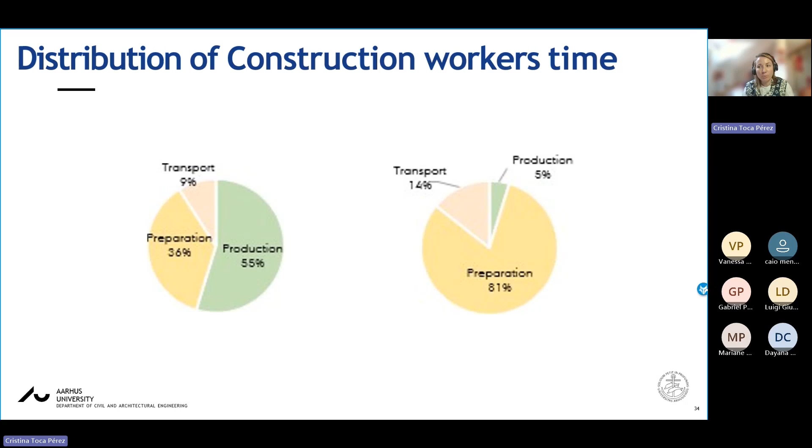It's important to understand workers' distribution because it's not the same if our workers spend most of their time in production activities or in preparation activities. This is going to be very different independent of the kind of process we are studying. But in general, thinking with our lean construction philosophy in mind, all of us want our workers to spend most of their time in production activities.

If you are not familiar with the idea of which is preparation, which is production, or which is non-value-adding activities, we need to remind ourselves of the transformation-flow-value theory from Koskela in 1992. I know some of you are familiar with this theory, but just to have in mind and refresh your minds.

Production in the past was seen as just transformation activities, or transformation of inputs into outputs. But more than 30 years ago, Professor Lauri Koskela from Finland developed a theory that we cannot see production in the construction industry as just transformation. Production is more than this.

We need to consider production as a combination of three kinds of activities: the transformation, which are the activities that add value; the flow, which is also the flow of materials that are part of the process; and the value, which is the cost, what the clients or customers require.

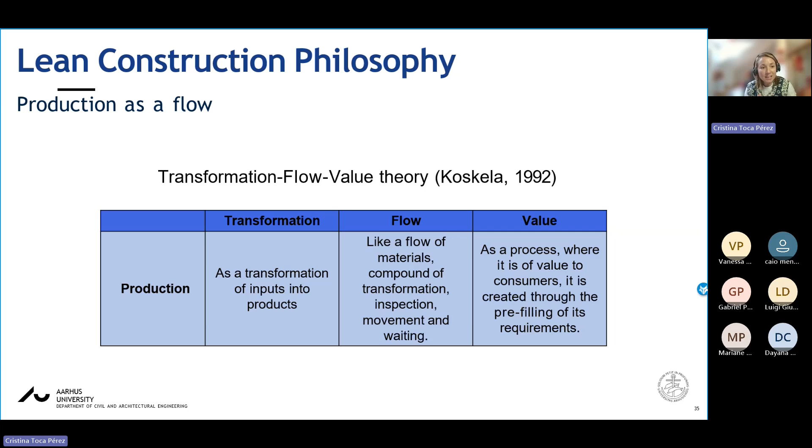Production is a flow of materials and information from raw material to the final product. Having this in mind, the only activity that adds value to the client is the transformation, which is when we transform a material into something else—it can be a new product, or a secondary product, or a sub-product.

In order to make our process more efficient, we need to reduce the number of steps or activities that do not add value to the process. It means we need to reduce the number of storage, transportation, and inspection activities, and try to maximize our transformation activities—spend as much time as we can in transformation activities.

So how do we understand or see how much time we spend in transformation activities? Transformation activities are important because the client of our products is ultimately going to buy square meters, or something that we have developed or transformed.

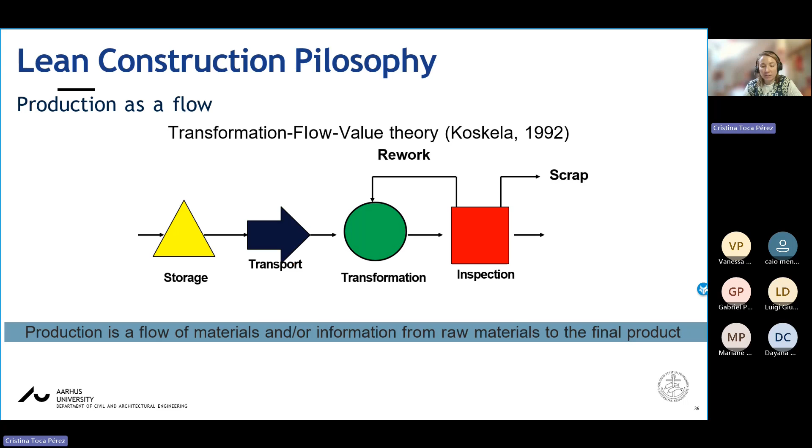In the lean construction philosophy, we understand transformation as the activity that adds value, and the others do not add value. So having this in mind, some researchers have developed techniques to understand how much time we spend in those kinds of activities, in transformation, and the other kind of activities.

One of the most famous techniques is the work sampling technique. It has been called in different ways. In Portuguese, we say amostragem do trabalho, but all of them have the same base, which is a random observation method where we try to determine the percentage of occurrence of certain activities by statistical sampling, random observation. It involves taking a small sample of occurrences in the overall activity.

So I'm going to explain in my own words what this means. You are in the job site, you identify a process, and you try to see how much time the workers spend doing this kind of process. Imagine they are applying mortar on a wall. How much of their time do they spend applying the mortar? They are transporting the mortar bags on the job site. How much time are they spending looking for the measuring tools?

If we take as many samples as we can, then we can say that the number of samples is going to represent how it happens every time on the job site. So which are the main steps for making a work sampling?

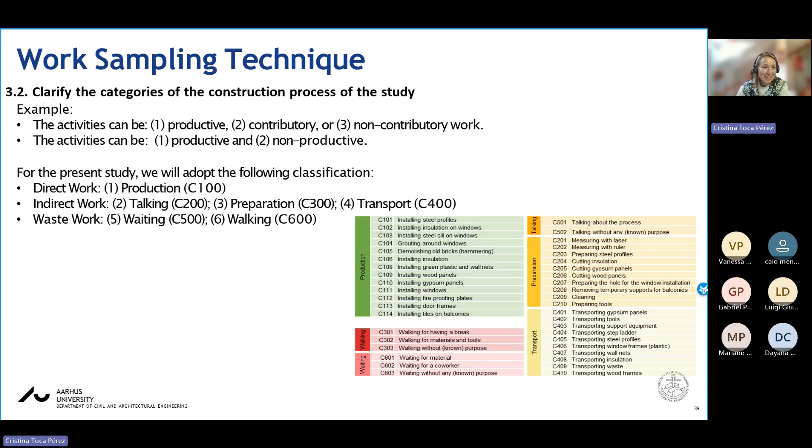In this case, we used an iPad for making the collection. So every time that we saw a worker, we identified what kind of category they were doing. It was preparation, transport, and then we have it's just a counter. And then you have, okay, I have observed 20 observations out of 100. So 20% of their time they were doing preparation.

I observed 50 times doing walking. So 50% of the time they were doing walking. So you can say if they have 8 hours of work, they were walking 4 hours, for example. And this is how it works, this is just a count. And this is how the work sampling technique works. It's a screenshot, you need to say what you are seeing in that specific moment and register it.

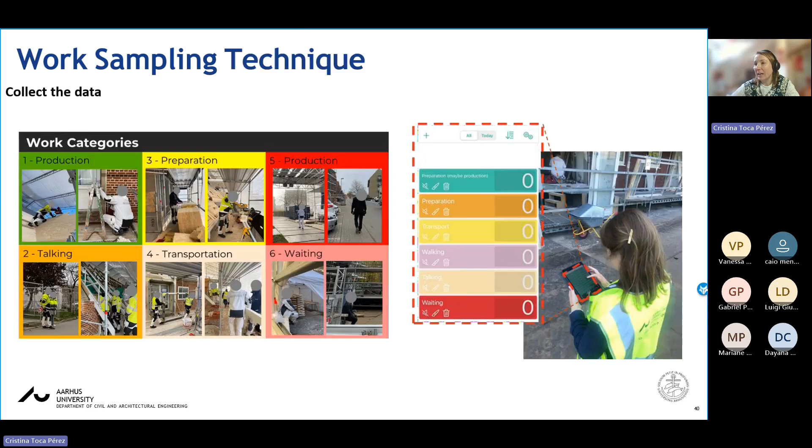And then with the data that you're going to collect, you can make different kinds of analysis. You can try to see in 8 hours of work how much time they spend, but also you can see in which hours of the day they spend more time in preparation or in transport. For example, you can see that at the beginning of a day they are spending more time in transportation, and then in the middle of the day they are more productive and spend more time in production.

So this is generally what the work sampling technique has been doing in the last 20 years. But that technique, or that way of making the work sampling, has been very criticized for several reasons. Some of them are because it's just a snapshot, so what you have is what you are seeing in that specific moment, but it can be different in another moment, or on another day, because it changes a lot.

Because you know that the construction job site is an environment that changes every day, so maybe what you are seeing one day is going to be different from another. And also it's criticized because we can interrupt, maybe the observer is interrupting the workflow. So if you have the presence of an observer there, maybe the workers are acting in a different way than normal. Maybe they are trying to be more productive, or maybe they are just distracted. So one of the criticisms is that in some cases the presence of an observer can interrupt the workflow.

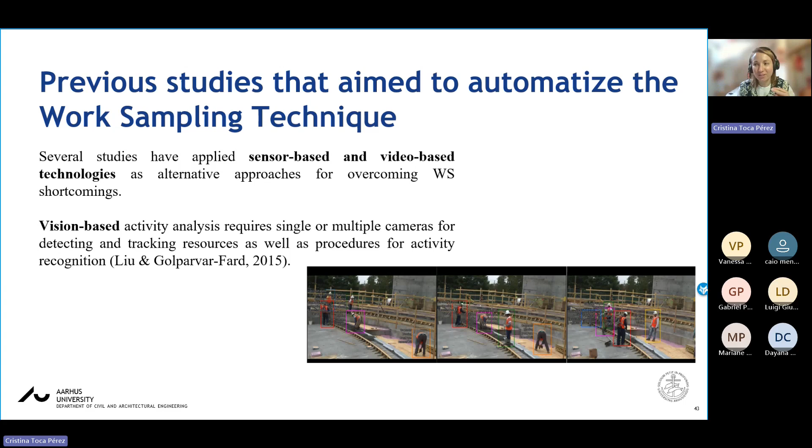Some researchers are using machine learning: they make the video, and then with machine learning they classify the categories of the activities. Another kind of study uses sensor-based technologies to identify the movement of the workers. So now it's not just that I can see he's painting or applying the mortar.

It was about using sensors on the body of the workers to try to identify the posture and the motion. With the accelerometers of the sensors, he tries to say, okay, if he's moving like this, he's painting, but if his hand is moving like this, probably he's just walking. So this is what they are trying to do when they use sensor-based technologies.

But obviously it has a lot of limitations because it depends on the kind of activity they are doing. The movement of the hands and the body is going to be different. So it requires collecting a lot of data to feed the algorithm used in the machine learning to identify which kind of activity they are doing.

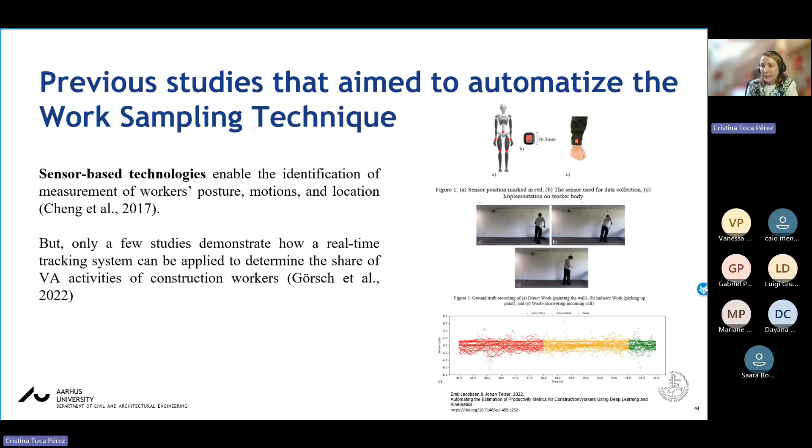Another study used indoor positioning like Bluetooth or BLE, Bluetooth low energy, to estimate presence indices. And that was our starting point. It's very difficult to make records of the job site because we need cameras, and it's also very difficult to have sensors on all the workers.

And even if we have sensors on all the workers, it's still going to be difficult because we need to tell the algorithm what each movement means, and it needs to identify which activities correspond to the accelerometer readings. So we said, okay, indoor positioning is something that can help us automate the work sampling technique. This is something they started in the group of Olli Seppänen at Aalto in Finland, and they began using indoor positioning systems.

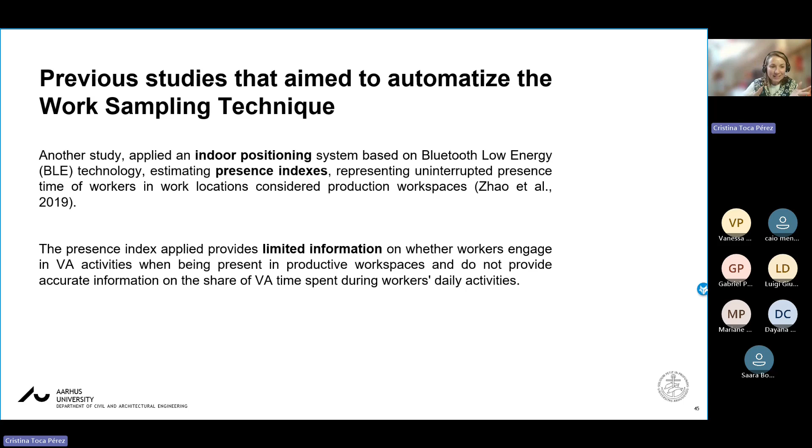They believe that the presence index can provide useful information. The idea is that the more you are in a specific place, the more likely it is that you are doing that kind of activity. It means that if you are in a production workspace, inside the building, it's more likely that you are doing value-added activities than if you aren't.

It makes sense thinking that way, because for example, if we are in our office or workplace, we are more likely to be doing value-adding activities, like reading or writing papers, or whatever makes you feel productive. But if you are not in that place, if you are in the corridor or the bathroom, you are probably doing other kinds of activities that don't add value.

So they have two basic assumptions. Presence is obviously not enough to say that value-adding activities are happening in a specific place, but it can be assumed. Also, if work gets interrupted, these interruptions are mostly non-value-adding activities. It means if you are in a production workspace and you are interrupted, it's probably for something that is not adding value, because someone wants to talk with you or needs something that isn't going to let you continue working.

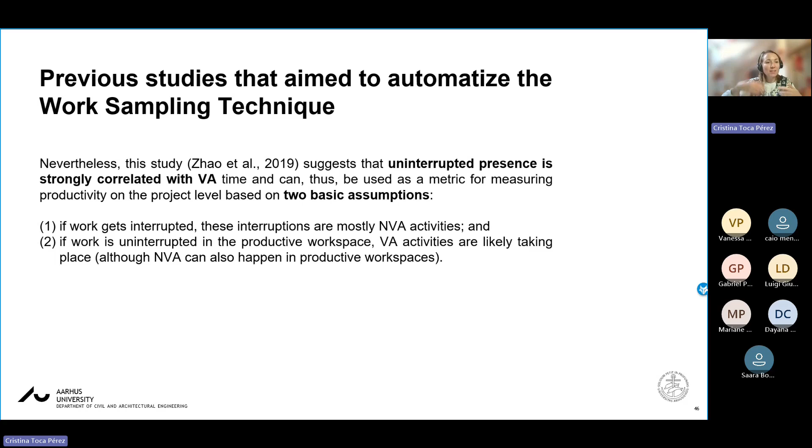Obviously, you can be in your workplace and do other kinds of activities, just thinking or talking, but it's more likely that you are going to be productive if you are inside the building in a specific place where you're supposed to work, rather than in other areas. So that was our assumption: let's think in position instead of trying to use the movements of the body to automate the work sampling technique.

This group of people from Aalto continued this idea, let's combine several kinds of data coming from video. They decided to continue recording, but also tried to identify the position, using head-mounted cameras combined with position data. They said, now we can record the workers, see what they are doing, and also identify where they are.

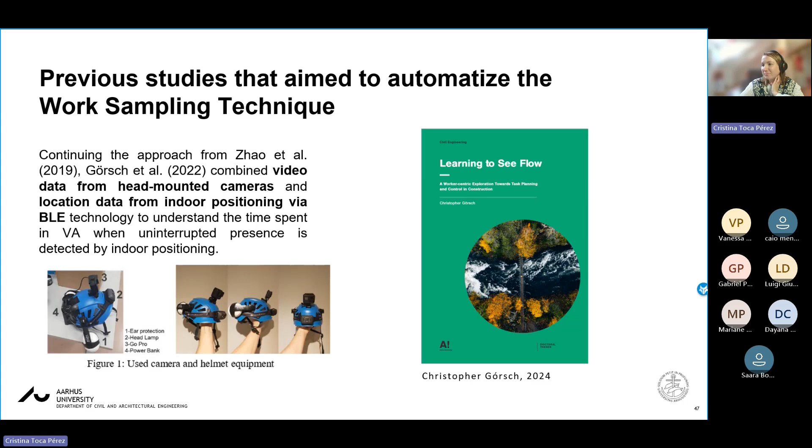You can see here the thesis of Christopher Górsch, a researcher at Aalto, Finland. They did a very detailed data collection, following a specific worker during his working hours, trying to record that worker and see what he's doing in an entire day. This took a lot of time, it was very time-consuming. Then they classified the activities into different kinds.

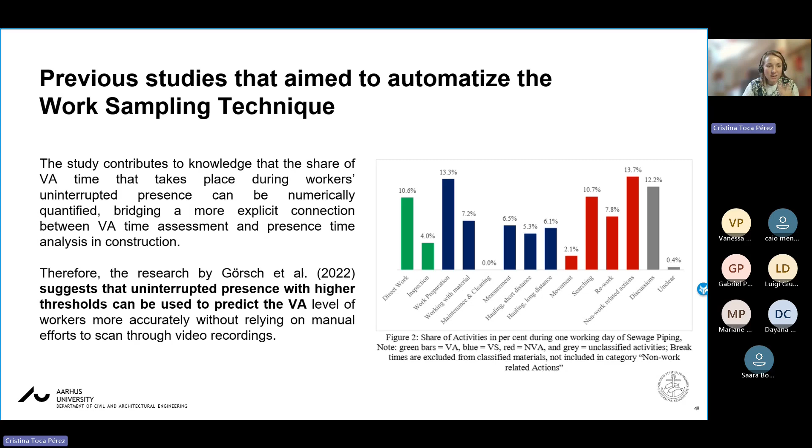And for understanding this—I'm talking too much now, Dayana. I can see it's already 50 minutes. Don't worry, okay. No, in the record it's already 50. No, don't worry, we are super good.

So for understanding this, we need to keep in mind three important concepts. I'm making a mix of a lot of things because we need a lot of previous information or background for understanding the study. We need to understand sensor-based technologies, location-based technologies, and wearable sensors. I know most of you are familiar with these terms, but let's have a look.

So sensor-based technologies—you are familiar with this. When we talk about cyber-physical systems, sensors are devices that sense. The proper word says what it's doing: sense. Sensors can feel, see, hear, smell, taste, just like our own senses. So a sensor is a device that detects something from the physical environment and transfers that information into data. That's what a sensor is, a device that senses and transfers that input into data.

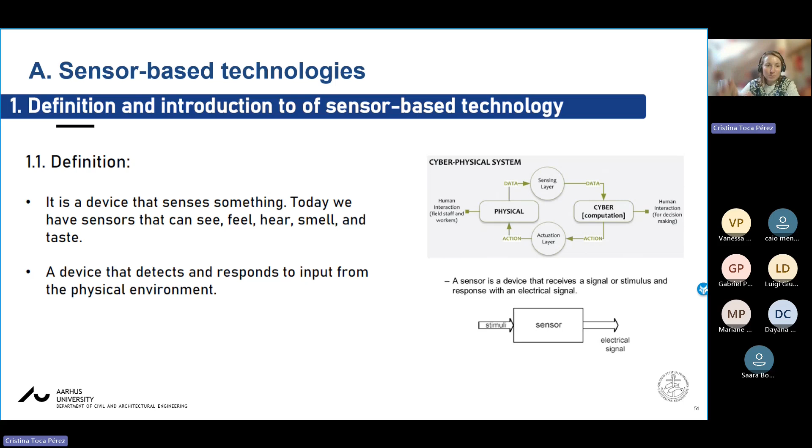And then obviously you can move to the cyber, to the physical environment, but this is not what we are going to talk about today—you've already covered digital twins and how you can transform and move between those environments in previous lessons. Okay, so this is a sensor.

Then we need to understand what a location-based sensor is. There are different types of sensors, and some of the more popular location-based sensors are the GPS system, the global positioning system. Then we have RFID, radio frequency identification. Then we have the geographic information system. All of them have in common that they collect spatial information, information about the specific place.

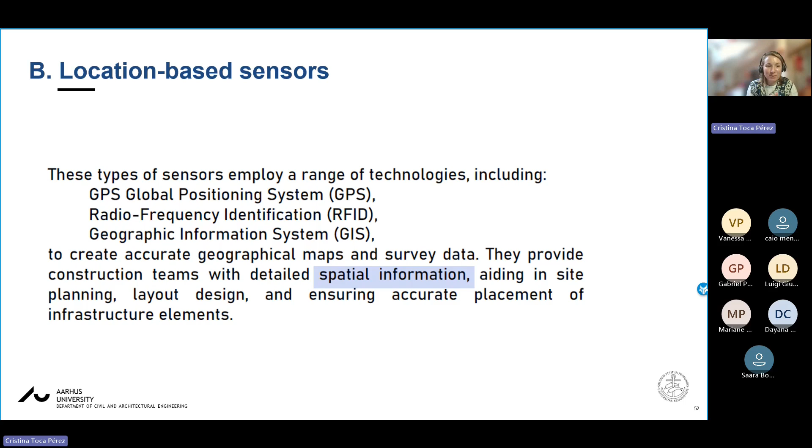And then there are several kinds of location-based technologies. As I mentioned, we have GPS, and also others like Zigbee, ultrasound. The difference between these sensor-based technologies is accuracy, and it depends on what you are looking for and your interest whether you use one kind of sensor or another. If you want very high precision and accuracy, you'd go to ultrasound or Zigbee. But in our case, we are trying to identify where the workers are, so it's not important to see if they are one centimeter here or there, it's just something more general.

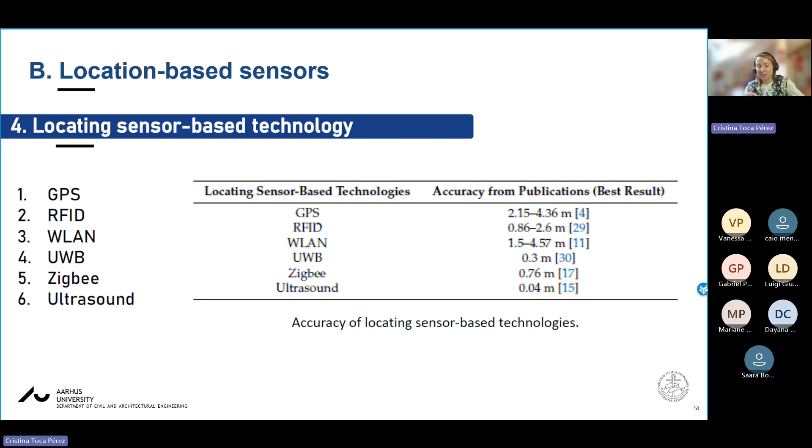It can be in a frame of 1 meter or something. The accuracy can be something like this. And then continue talking about the location sensor-based technology.

We have the most famous concept, which is global navigation satellite system, which we also call GNSS, and it's a network of satellites. Generally we make the mistake of saying GPS for all navigation systems, but GPS is one specific constellation, while GNSS is the concept that covers all of them. It depends who owns those satellites, so there are several names. For example, the famous GPS is from the US, but here in Europe we have the Galileo, and the Russians have their own satellites, called GLONASS.

GPS is a global position system, and the difference with the others is that it's a network of satellites, and there are several constellations. So we are going to use a global navigation satellite system to identify the position of the workers.

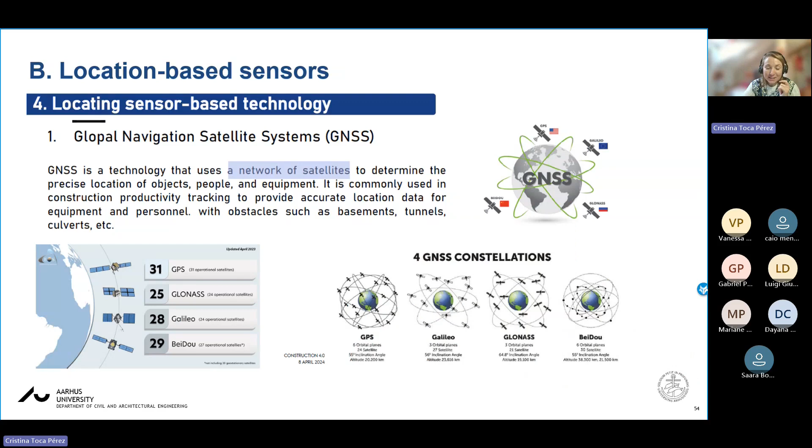I said we need to keep in mind 3 concepts: sensor, location-based technology, and wearable sensors. Wearable only means the kind of platform we are using for moving our sensors. The sensor can be placed on the job site in different platforms.

It can be stationary, placed in a specific place. It can be handheld, equipment mounted, wearable, or on a trolley. It can also be on unmanned aerial vehicles, like drones, as you are very used to. So it doesn't matter what platform you are using. What's important is the sensor you are using for collecting this data, right?

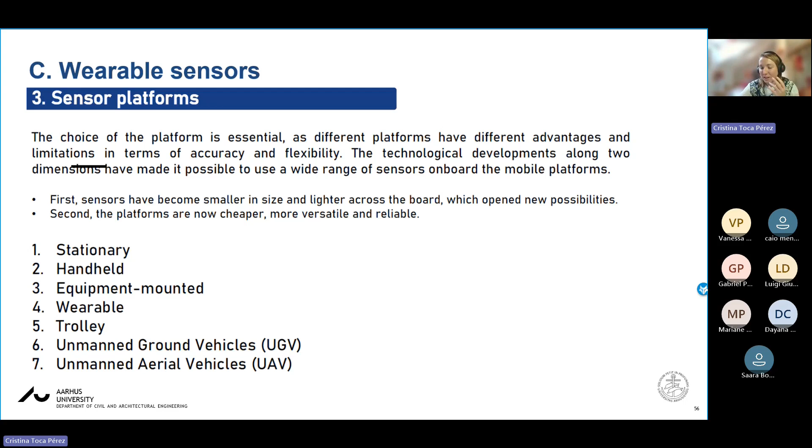You are very familiar with this. So in this case, we are going to use a wearable, because wearable is something you can wear, attached to the body, and the kind of sensor you place on it can be any. But in this case, we are going to use a wearable device.

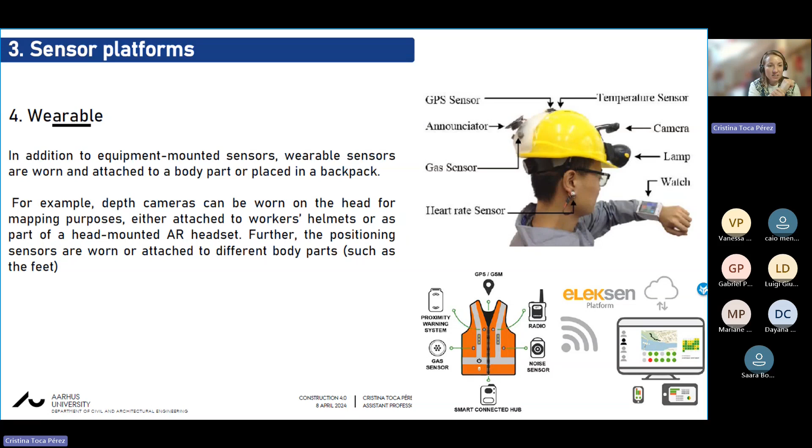This is a smartwatch, and the smartwatch has a lot of sensors, but the kind of sensor we used was the GNSS, just for understanding the location of the workers.

Before starting our research, we asked how other people or researchers have used smartwatches or wrist-worn sensors in the construction industry. What we saw is that in most cases we could classify the studies into categories, and we saw that most people who used wearable devices in the construction sector did so for 3 main purposes: activity recognition, and health and safety.

They also made this kind of study. Health and safety is also for understanding how workers feel when they are on the job site, but not psychological safety—rather, their heart rate, their blood, so they can investigate the workers' physical status.

What we saw is that in most cases, when they used wearable devices for activity recognition, it was very limited, and in most cases it was in a laboratory. They used one worker, or data from one worker, in a very controlled scenario, replicating the kind of activities a normal worker does on the job site, so they don't have a large sample in their studies.

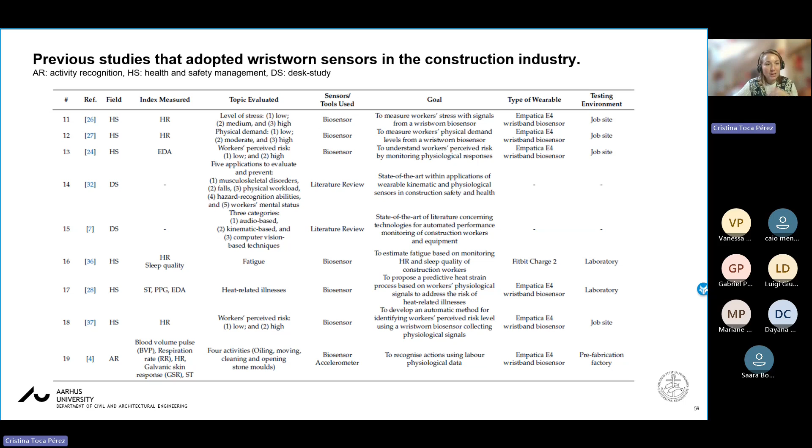Before moving to how we transformed the data collected from the smartwatches into information, I want to show you this pyramid that you're probably familiar with, but it's necessary to understand it. In this pyramid we transform data into information when we connect the data, and then when we connect this information with our previous background, we have knowledge, and if we can predict or make further analysis, we have wisdom.

It's important because sometimes people say, okay, if we use smartwatches on the workers, we're going to understand where they are. Okay, yes, at the end you're going to have this kind of information, but it's not going to be as simple as you can imagine.

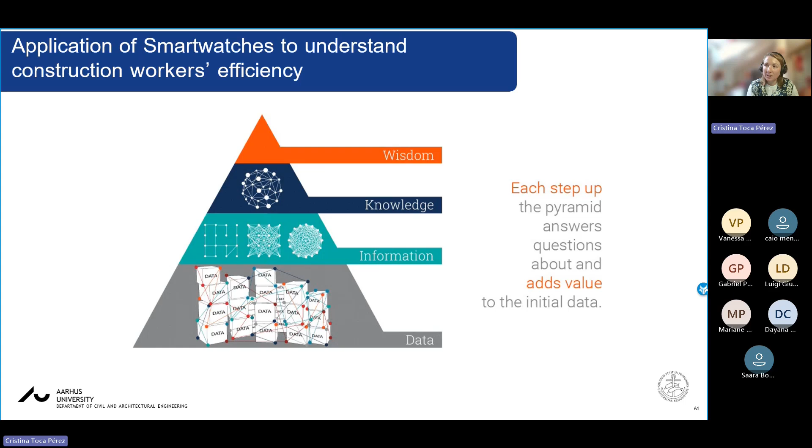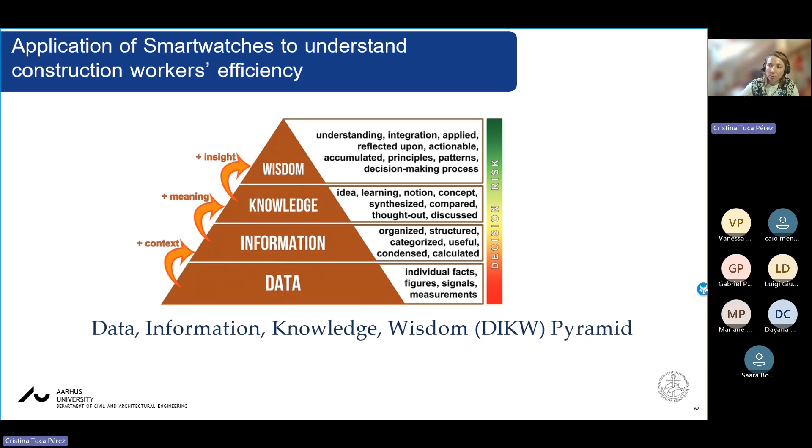So let's move to how we move from data to knowledge. Data—you know what data is, all of you are collecting data. Data are figures, signals, individual facts. When we add context, we transform this data into information, and when we add meaning, we transform this information into knowledge, right?

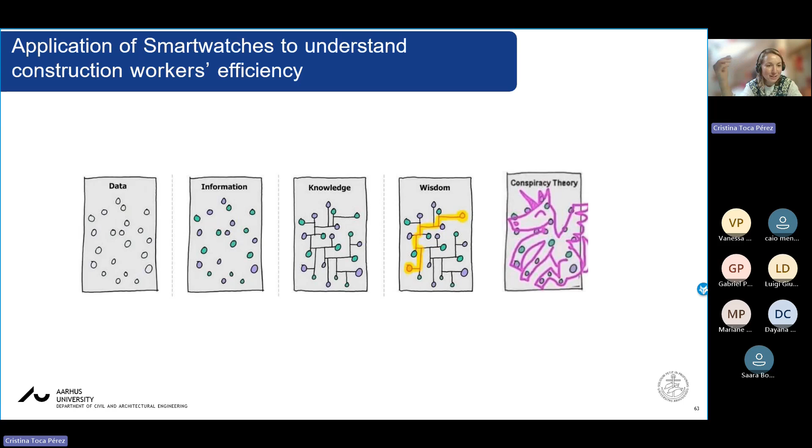Those figures or images are very famous when we want to explain this pyramid: data are those points, information is when we classify it or group the data, and knowledge is when we make the right connections. Wisdom is when we add context. And we have what we can see here, conspiracy theories, which is when you're connecting the wrong points—so you have the data and you're using it in a wrong way.

Okay, so continuing with the setup of the study. Those are the six steps I mentioned before, and we made a case study at a large job site. Most of the studies I did in Denmark are renovation projects, because as Denmark is a Scandinavian country, most construction activities there are renovation. This is for several reasons—they believe it's not necessary to continue building new buildings because we have a big stock of existing buildings, so it's more interesting to renovate what we already have.

So in order to produce more, we first need to renovate the existing stock. Also, these buildings were built in a state in the world when they needed to build very fast—they're from the end of the 40s, after the World War. They were built in a very fast way, and now they are not energy efficient. So we need to renovate that, and this is one of the biggest issues for all European buildings—we have an old stock of buildings that need to be renovated in the next couple of years because it's mandatory under a new law coming from the EU.

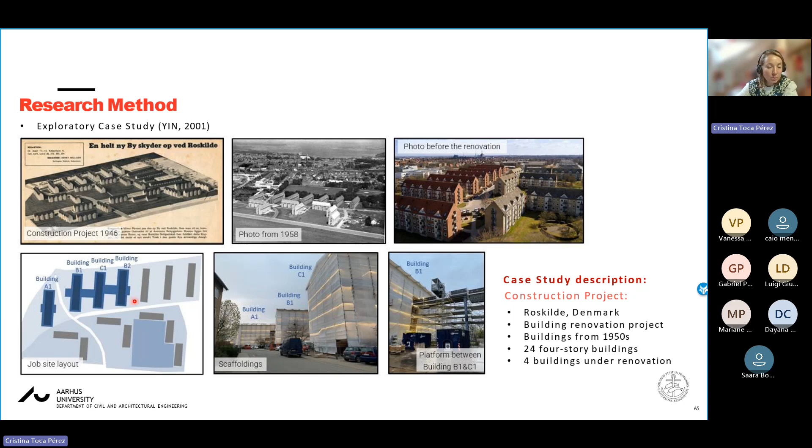So moving back to the job site: where are the value-adding activities going to happen in those specific buildings? Value-adding is going to happen inside the buildings, right? For example, if they're around the buildings, probably they are doing preparation, but if they are very far from the buildings, they are going to do other kinds of activities.

Then we needed to collect the data. For collecting the data, we used smartwatches, specifically the Garmin brand. Then we needed to transform this data from the Garmins.

We need to extract what kind of information we're collecting from the Garmins, which we'll see later. Then we need to clean the data, analyze it, and also visualize this data. I'm going to go into detail of each step.

We classified the job site into 3 categories. It could be classified in many more, but since this was the first study, we decided 3 categories was enough, though we later classified it into others. So we classify it into production, which are the buildings under renovation.

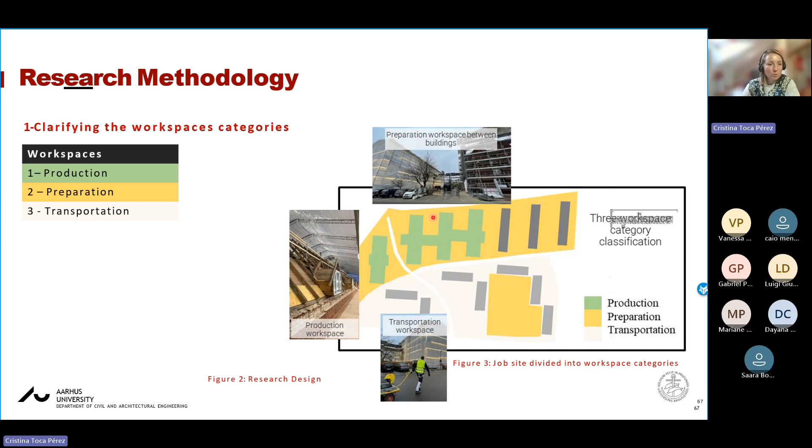Then we have preparation, which are the surroundings, and transportation, which are the areas around the buildings. So now we can say that if a worker is in production, they are likely doing production activities. If they are in preparation, they are more likely doing preparation, because it's not possible to do production if you're not in the building you need to renovate.

Continuing that idea, then the data collection. For the data collection, we used these smartwatches. We have 20 smartwatches, but in this case we only used 10. So we needed to deliver the smartwatches.

We selected the carpenter trade because most renovation activities are made by carpenters. We delivered the smartwatch to the carpenters, and the data collection lasted 7 days. We recorded every day from day 1 to day 7, during working hours from 7 to 3:30, with 10 carpenters involved in the study.

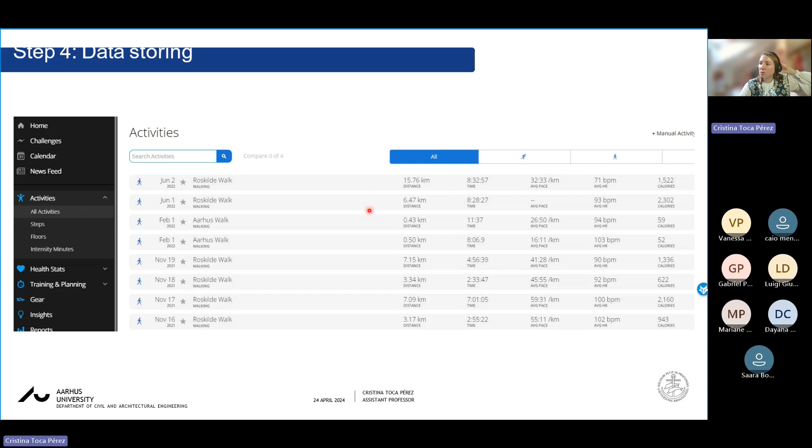For that, we also need another application. When we extracted the data from the app, this is how it looks - Roskilde is the name of the city where we did the data collection, and here you can see the days of the data collection, for example the distance and time they were working.

If we go here, we can see that on that specific day, for example in June 2022, that worker spent 8 hours and a half, and walked 15 kilometers. Think about that - in one day, one worker walked 15 kilometers, which is quite a lot, considering it can just be from walking.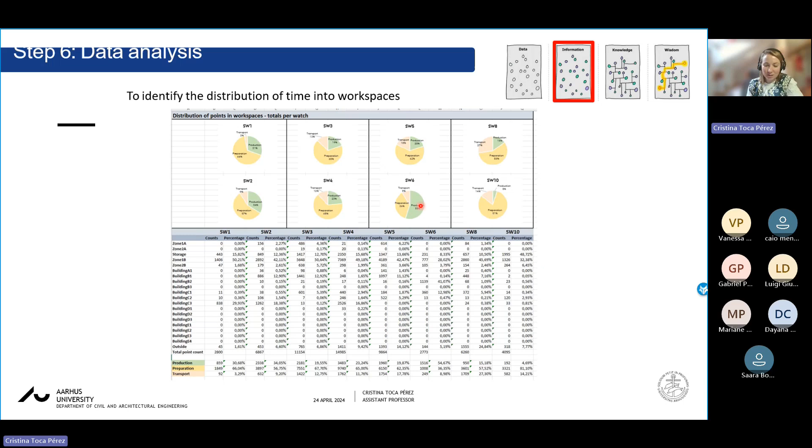So now we're almost close to automating the work sampling technique. Obviously, we cannot say which kind of activities they were doing, but we knew where they were.

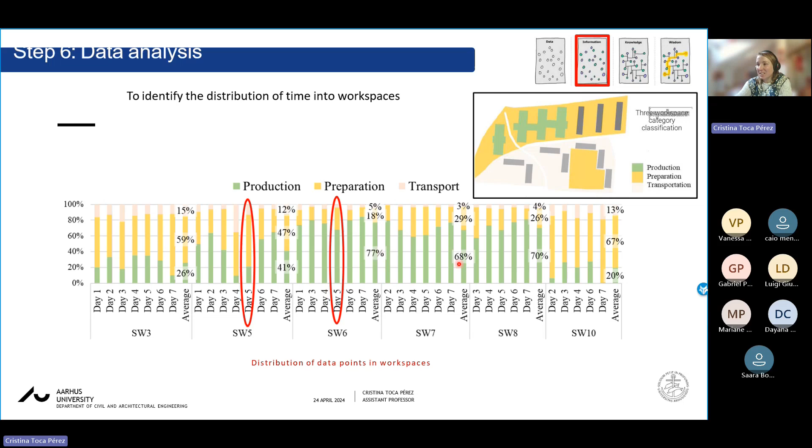And now we can compare the distribution of the workers. You can see here the total, the 100% of the observations and the days, and we can see the difference between the workers, the worker that was wearing smartwatch 5 versus smartwatch 6. So you can see here that there are several differences between the kind of workers. This worker is spending more time in preparation, and this other worker is spending most of his time in production, around 68% and 77% respectively.

So what we can see here is that we're trying to make correlations. The worker that is walking the most, for example, working 13, 14, or 10 kilometers in a day, is spending around 20 or 30% of his time in production workspaces. In comparison, a worker that is only walking 3, 4, or 5 kilometers in a day is spending 80% of their time in production workspaces, which makes a lot of sense. If you don't need to walk a lot, probably you are spending more time in production.

And how are we, as construction managers, going to use this information? This can be seen in different ways. Obviously, it depends on the nature of the activities they were doing, because some of them were in charge of transportation activities. But in other cases, the job site distribution impacted how much time they needed to spend moving around the job site. So having a proper job site layout impacted on their production time.

So as a site manager, we can use this information to see, okay, if my worker is walking a lot, why is that? Is it because of the nature of the activity, or because we planned the job site improperly and they need to transport a lot from the material storage space to the production workspace?

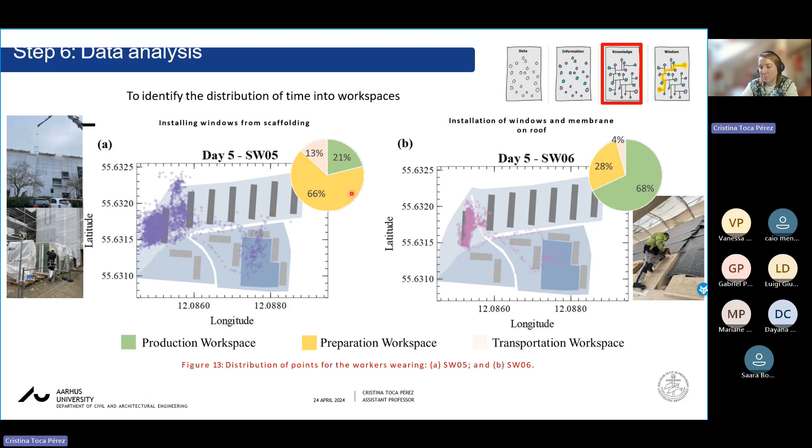So this is another example, another study I don't have here, but having a clearly defined work package in their schedule helped us use their time in a more efficient way, because otherwise they needed to look for information or material, or do preparation activities that do not add value.

So here I can see that it's a clear relationship, but the workers that are walking more are more likely to spend less time doing production activities. So as site managers, we can think about the job sites in a more efficient way so they need to walk less.

Here we made two rounds, one in November 2021 and another in May 2022. We can see that on average, in that period of the year, they walked around 9 kilometers and spent around 46% of their time.

Then they were in the second stage of the job site renovation. The material storage area was in the same place in phase 1 and phase 2, but they needed to walk much more in the second phase because the buildings were farther from the storage, so they had to walk more. On average they walked around 11 kilometers, and as a consequence they spent less time in production workspaces, probably spending less time doing production value-adding activities. So this is how the job site distribution impacted the distribution of workers' time.

This is how we try to automate the work sampling technique. We are not saying they are spending 30% of their time in value-adding activities, but this is the maximum number they can spend in value-adding activities, because it's the maximum time they were in the place where they needed to do those activities. Obviously they were also doing non-value-adding activities. So it's an approximation of the maximum quantity of time they spend on value-adding activities.

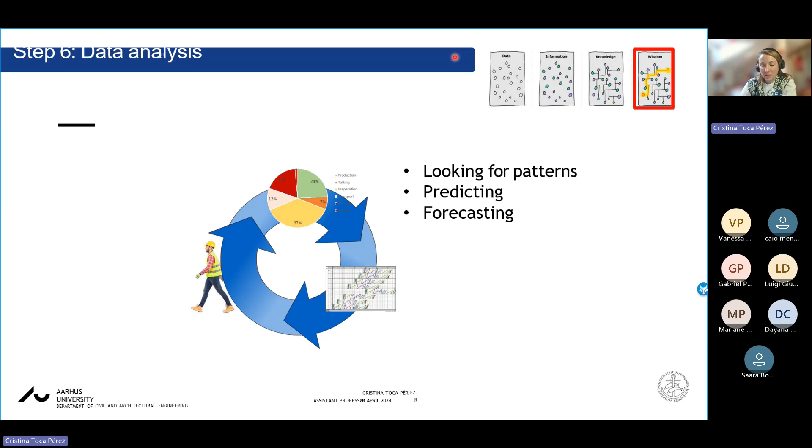And then the wisdom is how we can change our plans, how we can change the way we prepare the job site in order to have a job site that is easier for workers, so they don't need to spend so much time doing those non-value-adding activities.

And just to end here, we can move to the last part, which is the conspiracy theory. A lot of people were asking, okay, but you are tracking workers because you are using smart watches, you are trying to see what's happening in my breaks, what I'm doing every time. Okay, this is not like this. That wasn't the purpose. There were a lot of concerns about ethical issues, but we were not interested to see what they are doing.

We were trying to understand how site managers can plan the job site in a more efficient way to help workers do a more efficient process. I can show you here all the data points of one worker in a working day. Here there was a bakery, so obviously they moved to buy bread for lunch, but this is okay - we are not trying to make the workers into robots that always need to be on the job site. We want to use this kind of information or data to make the job site or construction process more efficient.

This is not about tracking workers - that's not like this. This is for site managers to be more efficient. This is how we move from data to information to knowledge to wisdom, and we didn't move into conspiracy theory. So that was an example of how we use wearable sensors, wearable devices, using sensor-based technology to try to optimize the work sampling technique.